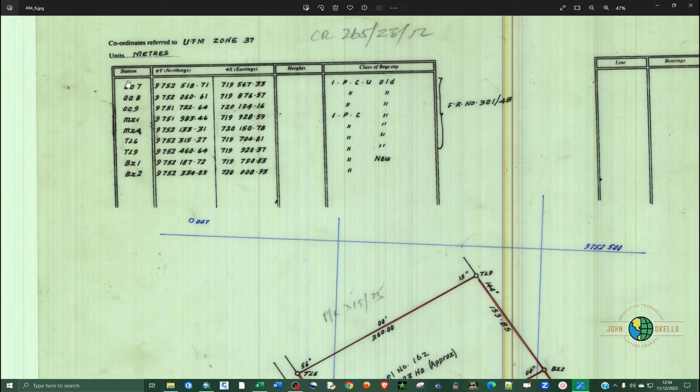You can see that we have the northings and the eastings, and then we have the values of those. And then you can see that the coordinate system that is being defined here is UTM zone 37 south, and then the units are in meters. So that's enough to actually help us plot the boundary of these two as one, and then subdivide that particular parcel of land into 7 equal portions.

So I already have the coordinates typed in this Excel file. In order to import this one into ArcGIS, we need to convert that into a CSV file. So just click on File, go to Save As, and then I'm going to save it in the same location where I have that Excel file.

But you can choose a different location. The name is going to remain the same. What I'm going to change is the file type. I'm going to change from Excel sheet into CSV. So I'm going to choose CSV comma delimited, but it can also work with text tab delimited. For this case, let me just choose comma delimited and then click save.

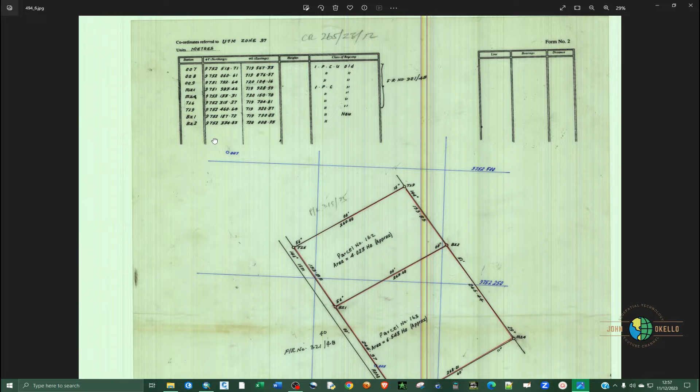So the X field should be easting. Easting is the X value, and northing is the Y value. Since we don't have the elevation, the Z field will remain as default. And then we need to define the coordinate system, and we saw that on the survey plan we have been told this data is in UTM zone 37 south. So I'm going to define that in here. I'm going to choose Arc 1960 UTM zone 37 south and click OK.

So click OK again. Sorry about that, just click OK. I don't know why this error keeps on popping, but click OK.

Now you can see we have the points here, and we need to convert them into a shapefile. So right click on these points, click data and go to export data. We need to work with shapefile. So this file type should be shapefile, but before we do that, let's navigate to where we want to save the shapefile. I want to save them in here, then give it a simple name like points.

This file type is shapefile. You might find that yours is in file and personal geodatabase, but for this case it's shapefile. Click save, click OK, and add the shapefile. So now that we have the shapefile, we don't need this Excel data. I'm going to remove it. So let's make a few changes on these points. I'm going to change the symbol.

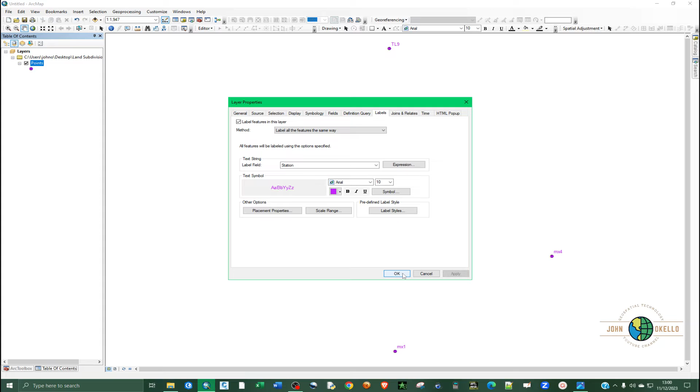and the name should have a color that matches the points. I'm going to also select the purple, and then font size I'm going to increase to 10, and then click apply and click OK. Now we have the points that correspond to this survey plan.

The next step is to create the parcel. But before I create a parcel, let me just have this work saved, because if something happens and you have not saved your work, you'll end up starting afresh. So let me name it as land subdivision, like so, and then click save. Now you can proceed to creating the parcel.

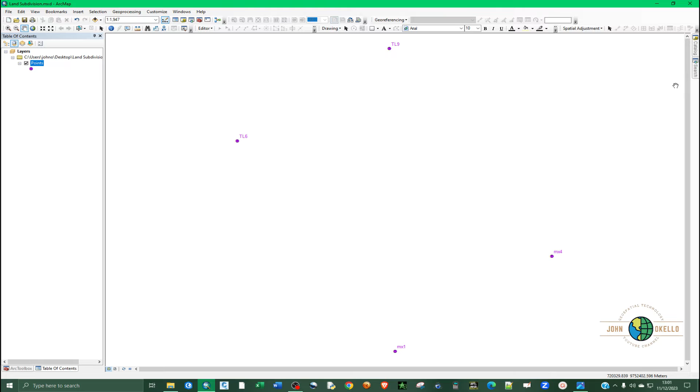Now we need to open up a catalog. You can open catalog by clicking on the Windows tab and then click catalog. You can also just find it at the top here, catalog. I have mine pinned on the right sidebar, and then I'm going to navigate to where I want to create. So I'm going to create a file geodatabase inside this folder here.

So in order to create a file geodatabase, just right click on that particular folder, go to new and choose file geodatabase. So give it a name. I'm going to say land subdivision, like so. Click enter, right click again. This time round we want to create a feature dataset.

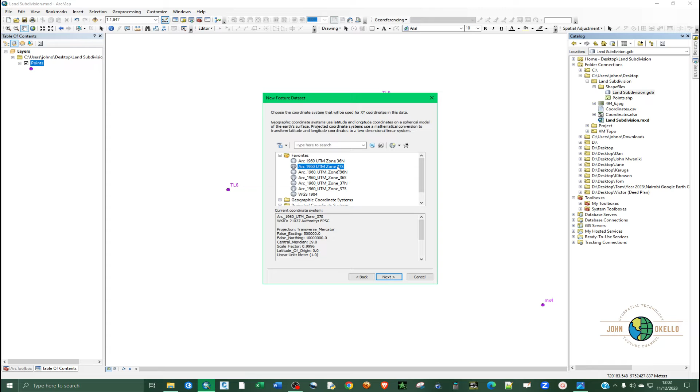So feature dataset, let me say parcel, and then click next, choose the correct coordinate system, click next, just choose everything default. So inside this parcel we want to create a parcel using a parcel fabric or parcel editor.

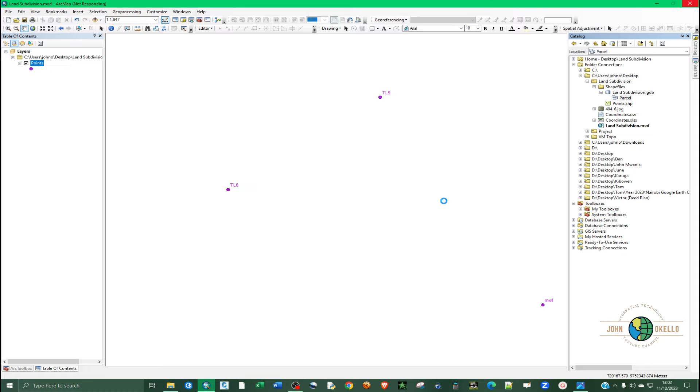Just right click on it, go to new. What we want is parcel fabric. Click on it and then give it a name like, let's say, plots. We're subdividing the parcel into plots, so click next. Everything leave as default and click finish. And then just give it time so that we can have a parcel created. Not necessarily created, but you now have tools to create parcels.

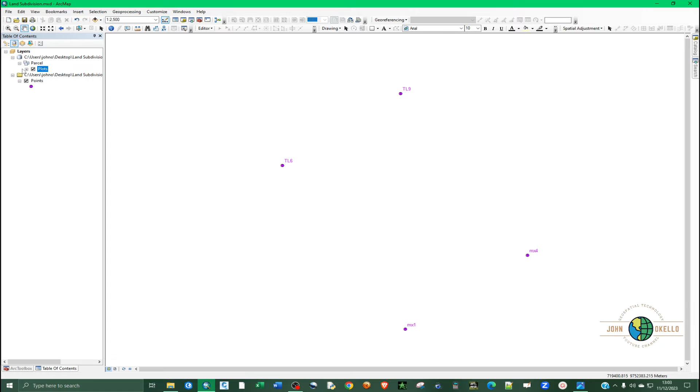So if I zoom out a little bit, on the table of contents, you can see now we have the plots, the parcel, and the dataset then plots. At the bottom of this, you can see we have parcel. So in order to create a parcel, we are not going to use a shapefile as normal, but we are going to use the parcel editor.

So in order to find the parcel editor tool on the editor, or if you're not seeing editor, just right click at the top here, and then you'll find editor here. Alternatively, you can just click on customize and then go to tools and select editor, just like that. And then under editor, just click on this arrow and then go to more editing tools and select parcel editor.

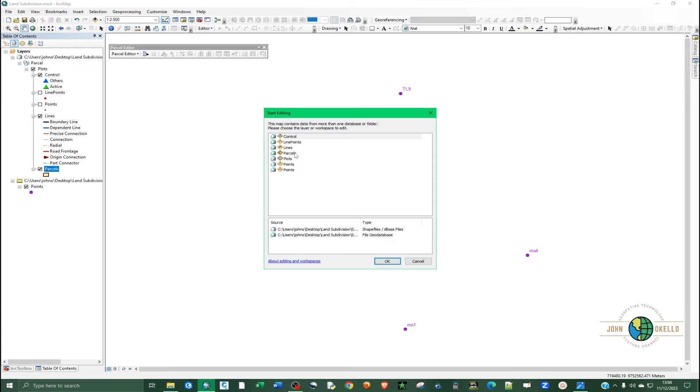So you can see that all the tools inside the parcel editor tool are grayed out. They are not active. It's because we are not in an editing session, and we need to do exactly that. Just click on it and then click start editing, then click on the parcel, and then OK. Now you can see that almost everything is now activated.

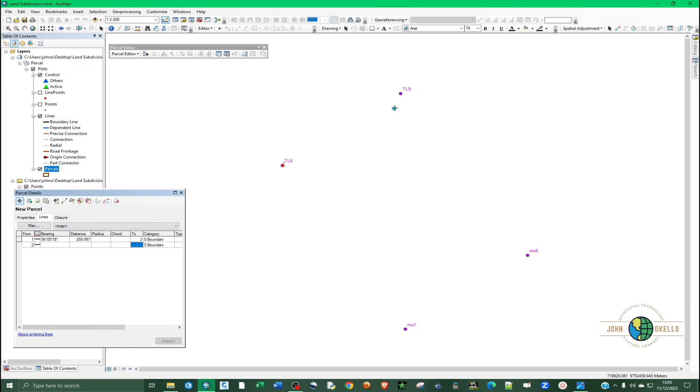The next step is to just create a new parcel. So the new parcel tab is the second one inside the parcel editor. Just click on it, and then you can see that the moment you click that, the parcel details window opens up, and you click on the first one, go to the second one. Oh, sorry about that. Let me show you.

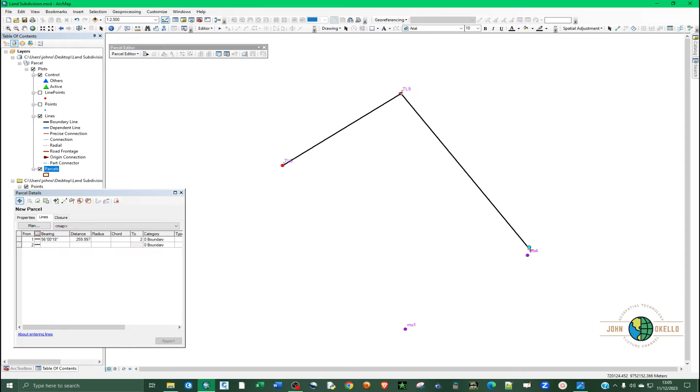If yours is not working, make sure that you right click anywhere and then click on digitizing mode. Make sure that this digitizing mode is activated. If I deactivate it, you can see that if I try to click here, nothing happens. So you need to right click and then click digitizing mode for you to have these lines.

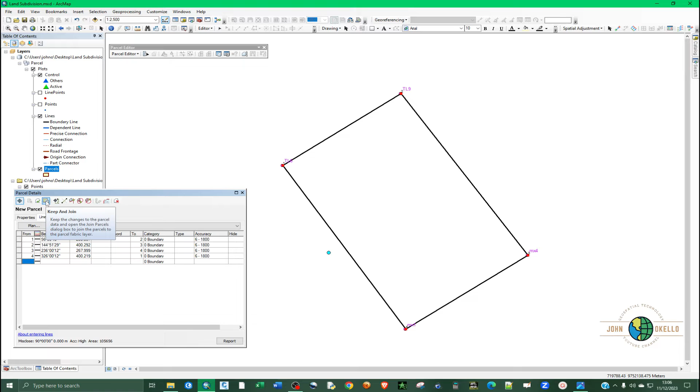Click next, all round like so, and then you can see now we have the details here. So what we need is to click on keep and join. The moment you finish digitizing your parcel, at the top of this parcel details window, click on keep and join. Don't forget that. And then make sure that the first radio button is checked, and then click join, and immediately you're going to have your parcel.

So you can now close that, save edits and stop editing like so. Now you can see we have our parcels. You can see the parcel is ready. Then just right click. We want to move these labels of points a little bit outside.

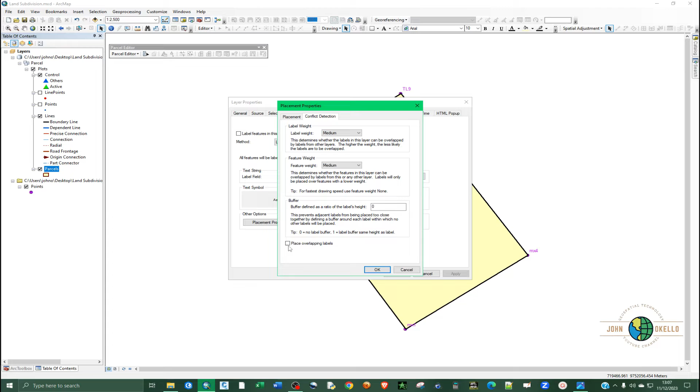So just right click on parcel, go to properties, go to labels, go to placement properties. Under placement properties, click on conflict detection. Label weight, make it medium. Feature weight, make it medium, and make sure that you select place overlapping labels. Click OK, click apply, click OK, and you can see now the point labels have moved a little bit outside.

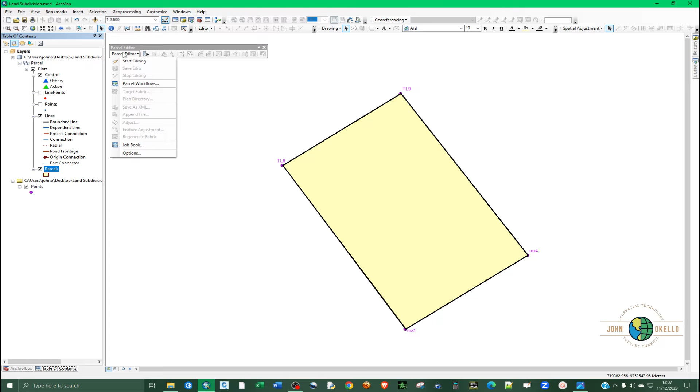Okay, so now that we have this parcel, we want to subdivide it into 7 equal parts. In order to do that, first of all, inside the parcel editor, click on this arrow and then start editing. What we are editing is parcel. Make sure that you select the parcel and click OK, and click inside the parcel that you just created or the parcel that you want to subdivide, and then right click on it. You can see we have parcel division. Click on parcel division, and you can see divide this parcel.

You can have into equal widths. You can have by proportional area. You can have into equal areas. But this one you need to be specific: you want each parcel to have a specific area. Since I did not compute that, I'm going to use by proportional area. The software will actually calculate and subdivide the land into equal proportions based on the parcel that you have provided for it.

But for equal areas, you need to do it yourself. It's more or less like proportional, but first of all you calculate the total area, and then you divide the total area by the amount of portions that you want, let's say 7, and then you specify inside here that you want each parcel to have this amount of area. Since we don't have time for that, we're going to choose proportional area, and we said we're going to have 7 parcels.

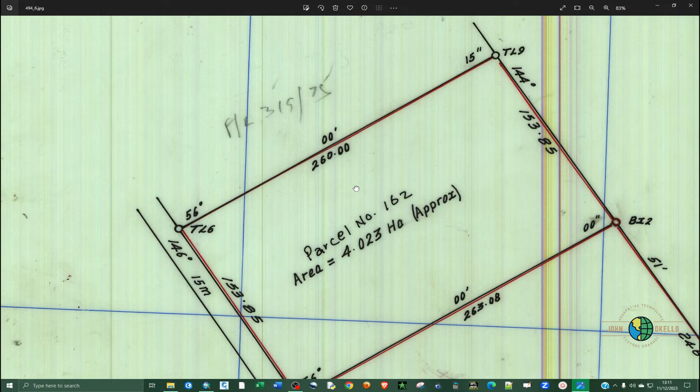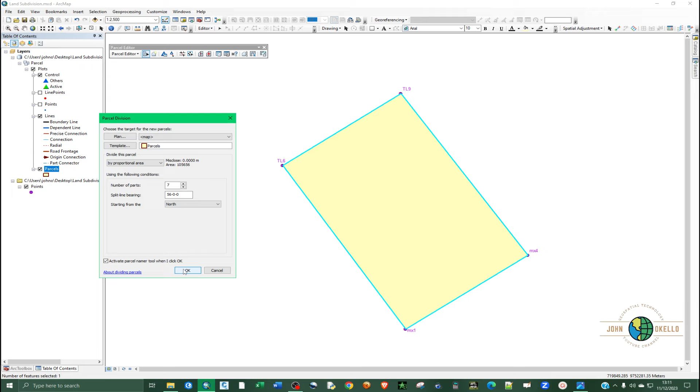So we're going to specify that, and then it will decide the direction. So 56 degrees, and then here you say it is 7. Let's run it from north to south. Let's click OK and see the results. Okay, now we can see our parcels are running from north to south in a 56 degrees bearing split. You can see the parcel details. You can scroll and see that everything looks good.

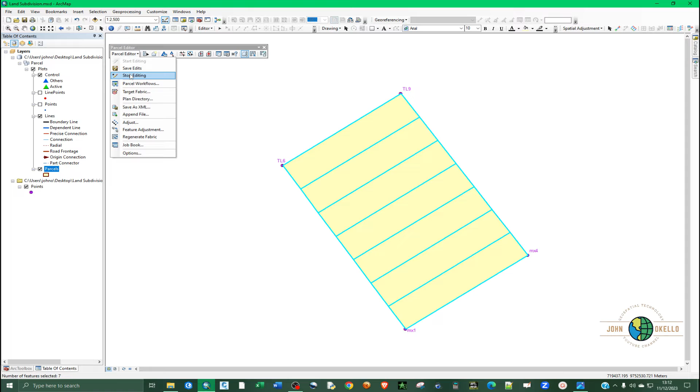So since that looks good, we're going to save edits, and I'm going to stop editing. Now we have the parcel here. If you open up the attribute table, you can see toward the end is the last field. You can see the shape area. You can see the areas are equal.

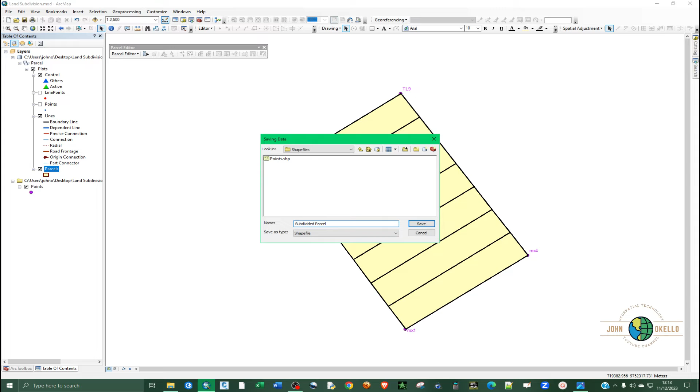So let's export this one to shapefile. Just right click and then go to Data and then Export Data. Navigate to where you want to store your data, and then let's call it subdivided parcel, like so, and then click OK. Yes, we want to add that. So if you minimize that, you can see, and then we need the lines.

You can see this polygon. We need the lines so that you can label the distances of each vertex. In order to do that, we are going to convert. Let me just leave this, or should we give it that color? I think that looks quite okay to me.

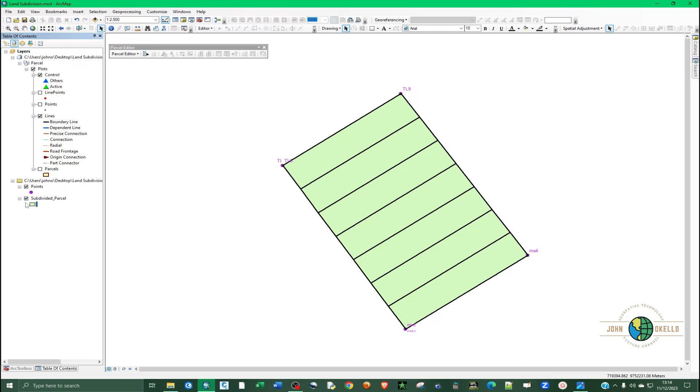Okay, so the next step that I'm going to take, as I said, we are going to convert this polygon to, let's minimize this, I'm going to convert this one to lines, polygon to lines. For you to do that, open up the toolbox. It's at the top here, but mine I've pinned it here. So just click on this and then go to Data Management Tools, go to Features, and then Feature to Line. Double click on Feature to Line.

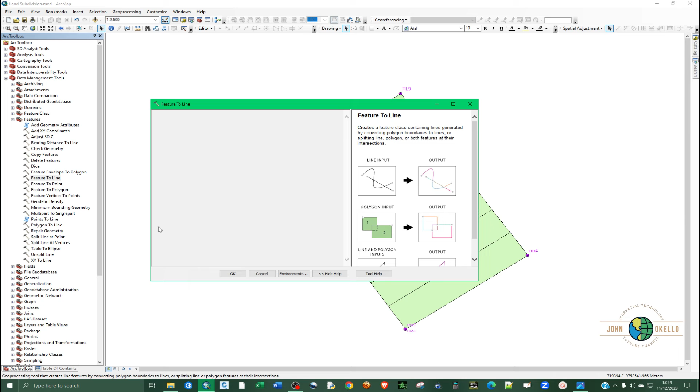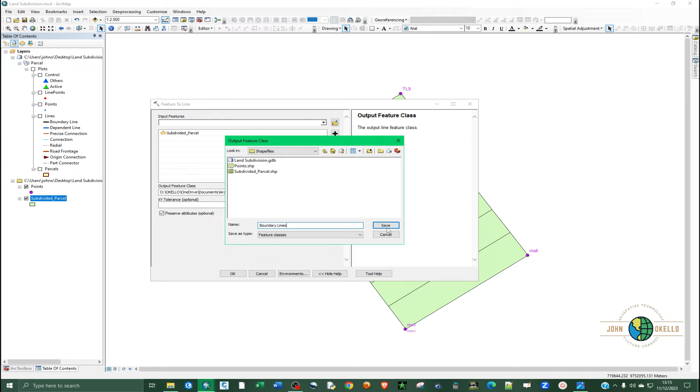So Feature to Line, input feature should be this one that we've just created here. Let me minimize that first. Should be this one, subdivided, the shapefile one, not this one, not parcels. So select subdivided parcel, or whatever name you've given to your parcel shapefile, and then the output folder, I'm going to store it in the same folder as where I'm working from. So let's say boundary lines, like so. I click save and click OK,

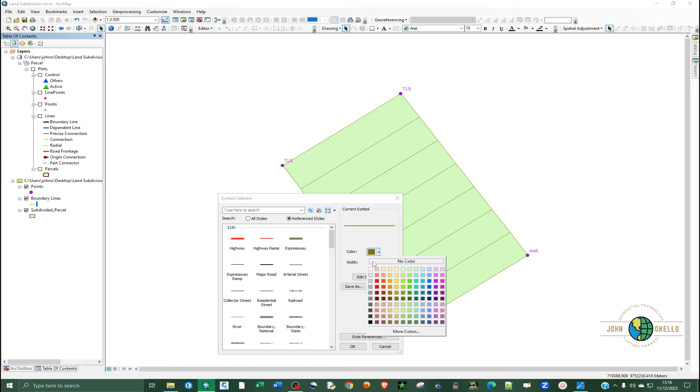and you can see that it's running. So let's give it time to convert the polygon to lines. So you can see now we have the lines. Let's change the symbol for lines. Let's increase the width to 1.2 and then the color to something like red, like so. Now we can see we have our lines in red. So I don't think we need this one here. I can just have them removed. Remember to save.

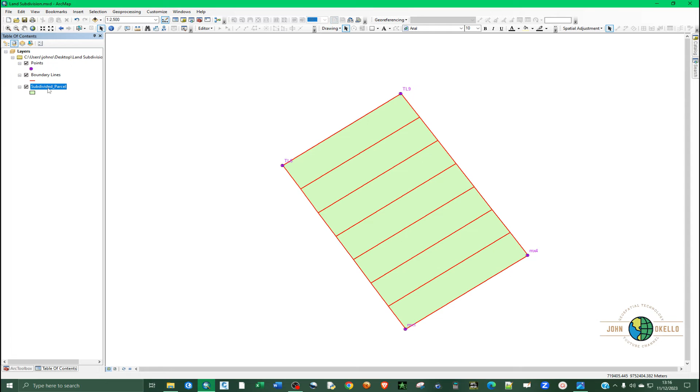So first of all, we want to label the acreage so that you can see how much is each and every parcel. So right click on subdivided parcel of land and then go to properties, and then right click and then go to open attribute table. So we have it here, but this one is in meters, let's have another field. Click on this option tool, I think it's called option tool, and then go to add field and give it a name like area.

So the data type should be double, then okay. You can see now we have it. Click on it, right click, go to properties, the alias will be in hectares, and then let's round that to 4 decimal places. Let's have our values rounded to 4 decimal places, and click OK, click apply, click OK.

Now, for you to do any calculation, be it length or area, as I said, you need to have your shapefiles in a projected coordinate system. So if you're having trouble trying to find or query the area, just know that you need to convert the coordinate system to projected. Make sure that your shapefiles are in a projected coordinate system. So we want to have this populated.

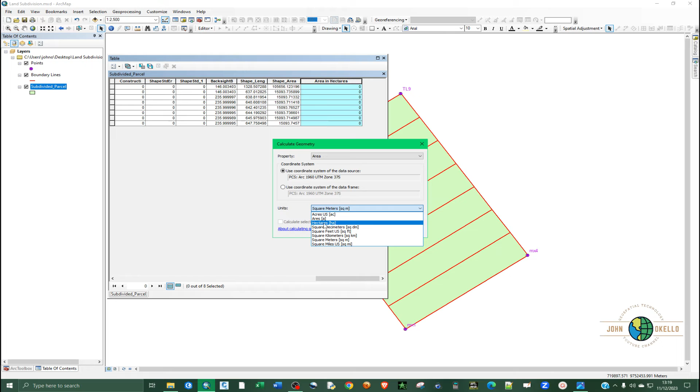Just right click at the top and then go to calculate geometry. Just click yes. We're going to calculate the area. So use the coordinate system, yes. And then we want the area in hectares, like so. And then click OK. Click yes. Now you can see each and every parcel is 1.5094 hectares except for the first one.

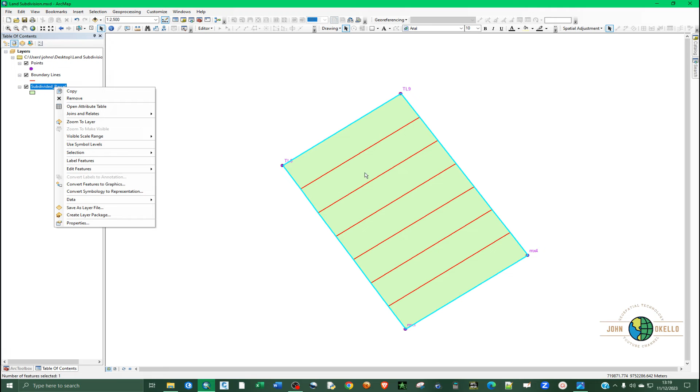And that's because if we highlight the first one, you can see it's the total acreage. So the moment we subdivided this piece of land, it did not get rid of the original parcel. So what I can do, as long as I have it highlighted, let me export it as a different shapefile. So export and say original parcel, like so, and click save. Click yes.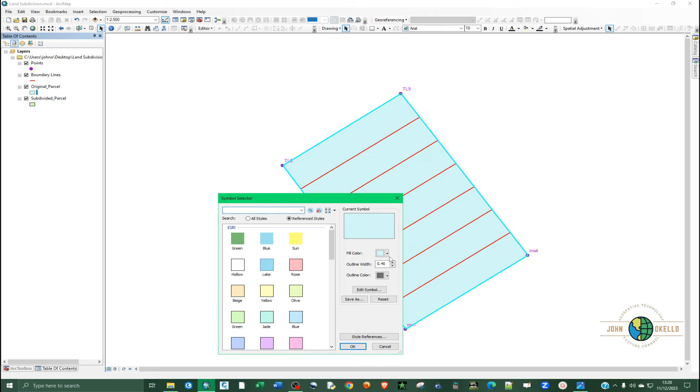Let's let it have a different color. Okay, so we can just have it brought down. Let's drag it below the subdivided land and check it. Now we said we want to start editing.

So if you check on these lines, you can see that the moment you start labeling the length of these segments, it's going to calculate the whole of this. So we need to make sure that each and every segment or line is independent of each other. So let me just stop that. So we are going to split that.

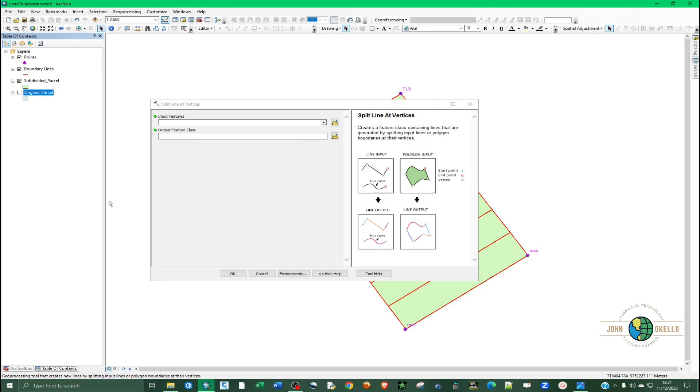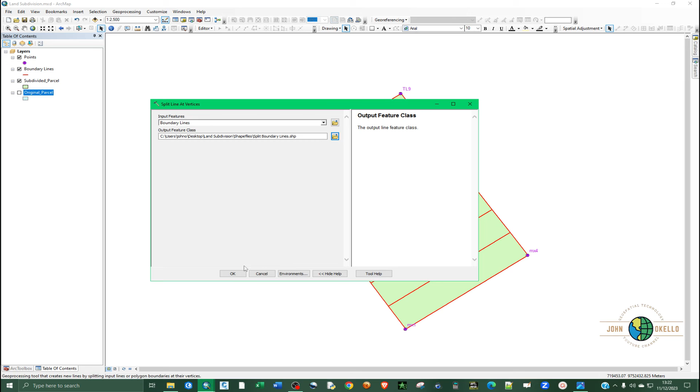In order to split these lines, again, open the Arc Toolbox, go to Data Management Tools, go to Features, and near the bottom you see Split Line at Vertices. We have Split Line at Points; we want Split Line at Vertices. Just double click on it and then add, not subdivided parcel, we want boundary lines. So we're going to split the boundary lines and we're going to give it a name, split boundary lines, like so, and click save. Click OK. Give it time to run.

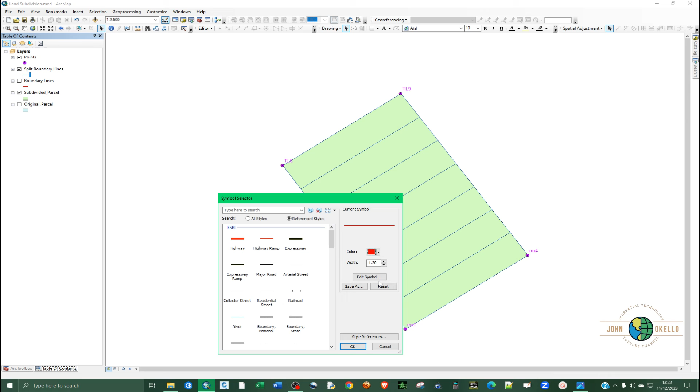So we have that. Let's change that one to have 1.2 width. The color should remain the same, red, like so. Now if you start editing session and try to click on it, you can see now we have line independently. So you can now have the distances.

So in order to reduce the confusion here, let me just remove this one. Just right click on split boundary lines that we just split and go to open attributes. We're going to create another field for distances, just the same way we created the ones for areas of each parcel. Click on these table options, go to add fields and say length, or just distances, like so, and the data type should be double. Click OK.

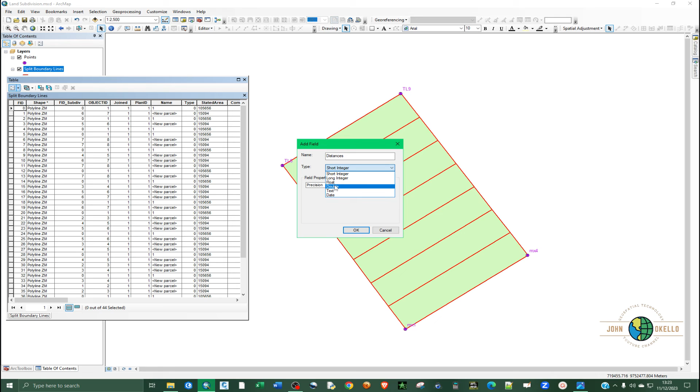So you can see we have the distances here. Click on it, right click, go to properties, click on numeric so that we can reduce the decimal places to 4. Click OK. Not 4. Distances should have 2 decimal places. Click OK, apply, and OK.

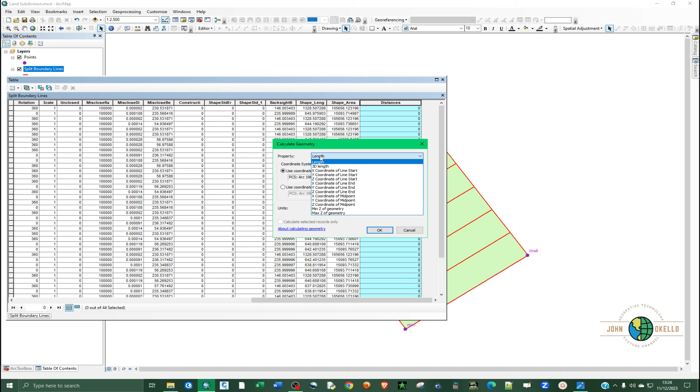Right click again on this header and then go to calculate geometry. So the property here is length, and then in meters, make sure that it is meters, or you can choose feet if you want. So click yes. You can see we have the distances.

So now that we have distances, let's first of all have the areas label. Click on subdivided parcels, right click, and then go to properties. Make sure that it's checked, and then let's select area in hectares, and then on the right tab there is this expression. Click on it. Delete that, select and delete, choose okay, so it's there, it's all right.

So we want to have it customized. We want to concatenate so that you can have a proper definition. So under the parser, choose Python, and then the field is, let's say we want to add a text, so double quotes and then type area equals to, and then space, click plus. This is a normal concatenation in Python, so you should not worry about it. But if you are comfortable, you can just select area and then have it labeled.

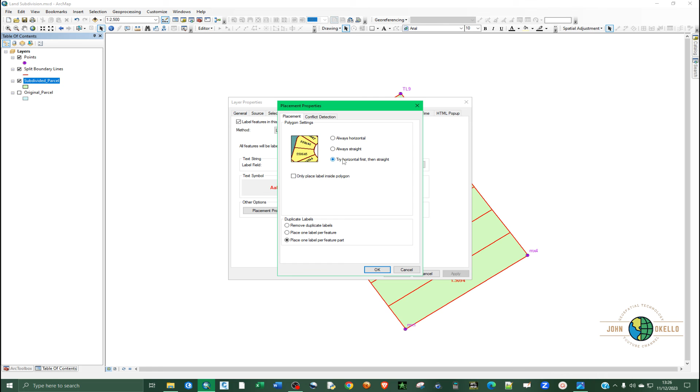First of all, let's just apply, and then bold, choose 10, change to red, apply, and then placement, go to placement and select try horizontal, then straight. Okay, apply. Okay, so if you want to have it this way, it should be alright. So first of all, we can see we still have 10 there, 10 hectares.

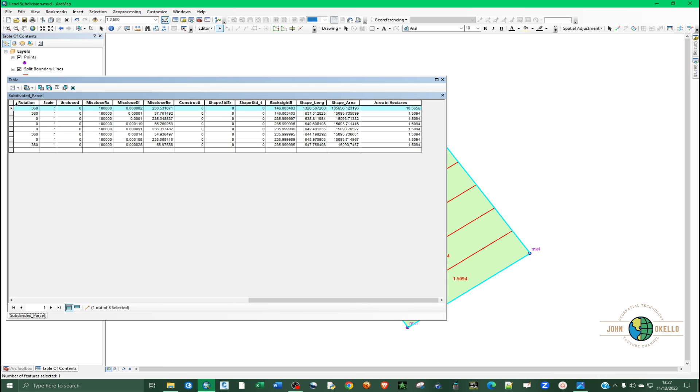Let's have it removed. Go to attribute table, and then make sure that you are in editing session. Click on editor, start editing, and then select the first column, not the header, the first row, and then click delete selected. So save edits, stop editing, like so.

Now you can see if you want to have this kind of label like that without having to add anything, that's all right. But we can go an extra mile and click properties so that people can know what those values are. So go to expressions and say you want to concatenate. For the parser, you can use VBScript. I'm going to use Python.

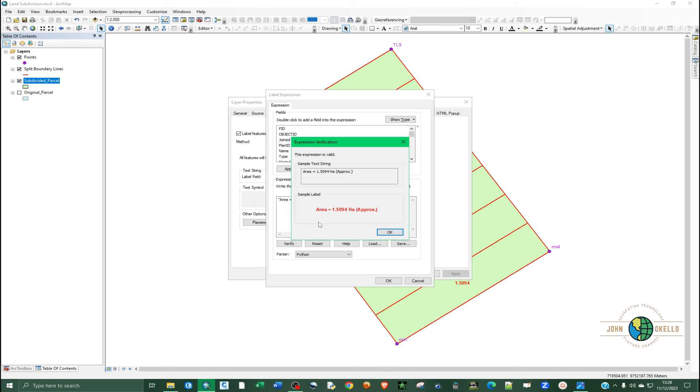And say I want to have area equals, double quotes, plus area plus space in hectares approximate. Like so. So if you verify, this is how this label is going to appear. So I'm going to click OK, click OK, apply, and OK. You can see now labels look beautiful.

Now the second step is to have the distances labeled. For you to do that, go to split boundary lines, or the lines that you split a couple of steps back. So right click and then go to properties. Check the first checkbox, label features in this layer. Let's increase that to 9 or 10. Let's make it 10 and see how it looks.

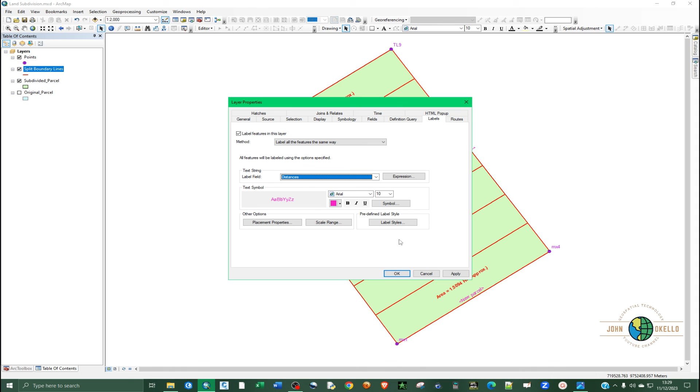And then let's now have a different color, something like pink. Apply. So okay, nothing appears. It seems that we've not calculated the distances. So we have the distances. So I think we chose the wrong field. Right click and go to properties and select not name, choose distances, apply. Okay, you can see now we have distances.

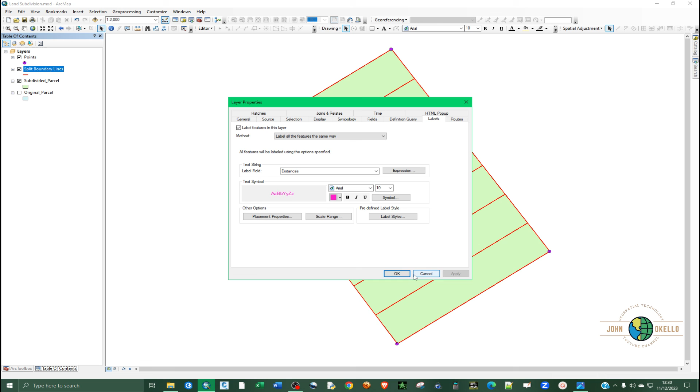Let's have them inside. Let's try and make them above and below and parallel. So I think that's fine. Click OK, apply. The offset, let's have the offset, or just leave it as it is. Apply. Okay, so you can see now we have the distances labeled and we have the area labeled.

So that's how you can subdivide a piece of land into equal pieces of smaller lands using ArcGIS. So that's it for this tutorial.